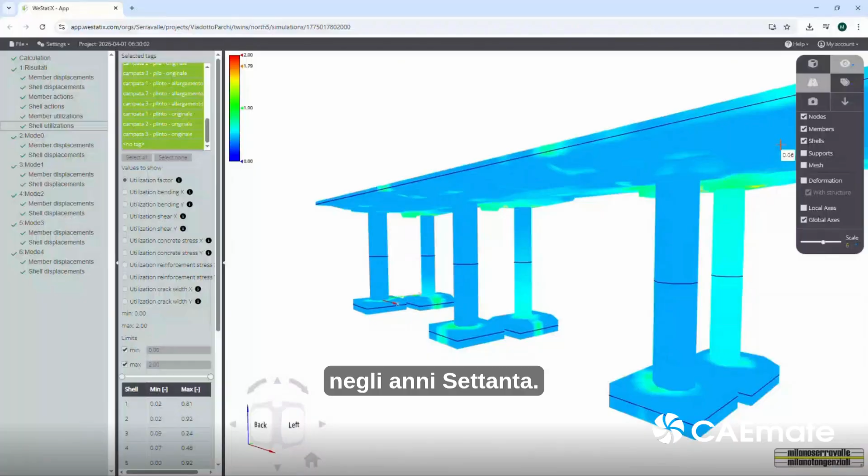Among these, one of the most significant structures is the Parchi Viaduct, located on the eastern ring road of Milan. The Viadotto dei Parchi is a critical structure within the Milano-Serravalle motorway network and plays a key role in the region's transportation infrastructure. Originally designed by the engineer Silvano Zorzi in the 1970s, the viaduct has a continuous deck structure with spans of 24 meters. The structure is made of post-tensioned and pre-stressed concrete. Its design features a zero-moment point positioned at 7 meters from the pier axis, realized through a Gerber-type saddle system that ensures efficient load distribution and structural continuity.

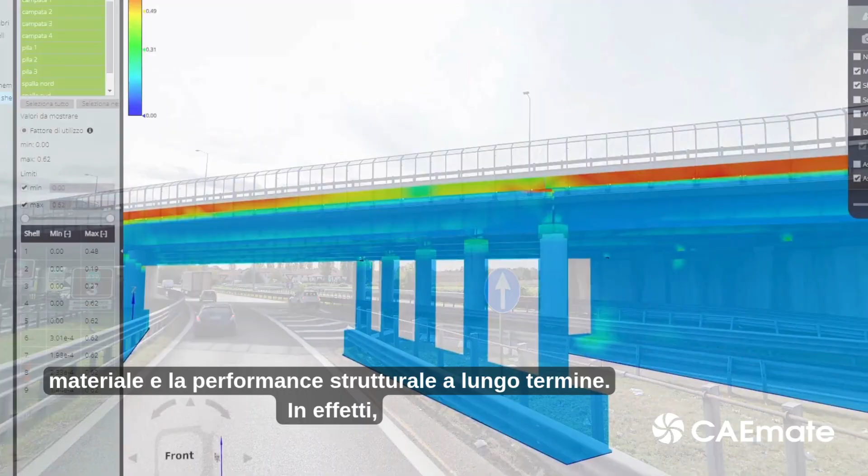The viaduct is composed of two parallel carriageways, each carrying a separate motorway lane, and extends nearly 3 kilometers in length, making it one of the longest and most strategically significant viaducts in the network. The structural complexity of the viaduct increased in the early 1990s when, in response to rising traffic volumes, an additional lane was added to each carriageway by widening the deck. This complexity makes the viaduct an ideal candidate for an advanced monitoring solution capable of tracking dynamic behavior, material degradation, and long-term structural performance. In fact, the structure was subject to periodic monitoring activities carried out mainly through inspection visits, which, however, cannot provide a quantitative assessment of the actual safety factor of the structure with respect to the load to which it is subjected. Finally, the inspection provides only discontinuous information on the structural behavior of the viaduct.

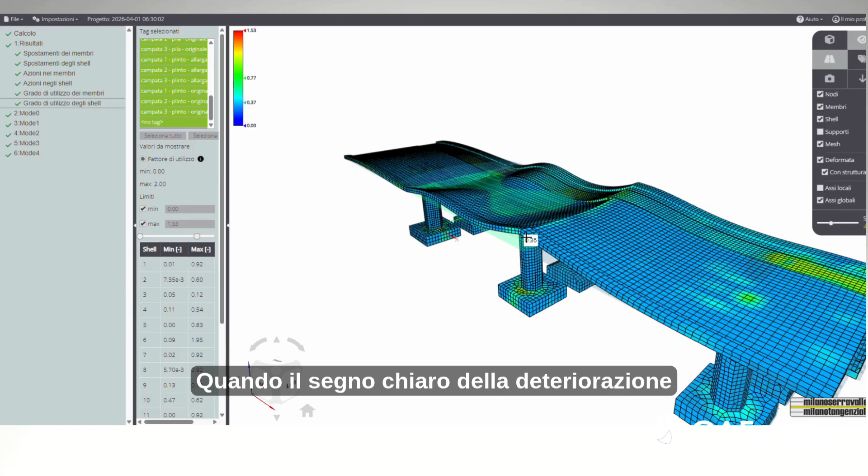Periodic inspections of all structures within the concession network are carried out by an external specialized company. Within our organizational structure, there is an office composed of 4 structural engineers who are responsible for summarizing the observations made and for verifying the data collected by the monitoring system. When clear signs of deterioration are observed on structures, it becomes necessary to carry out in-depth investigation campaigns and design checks, for which specialists are involved, generally from organizations external to the company.

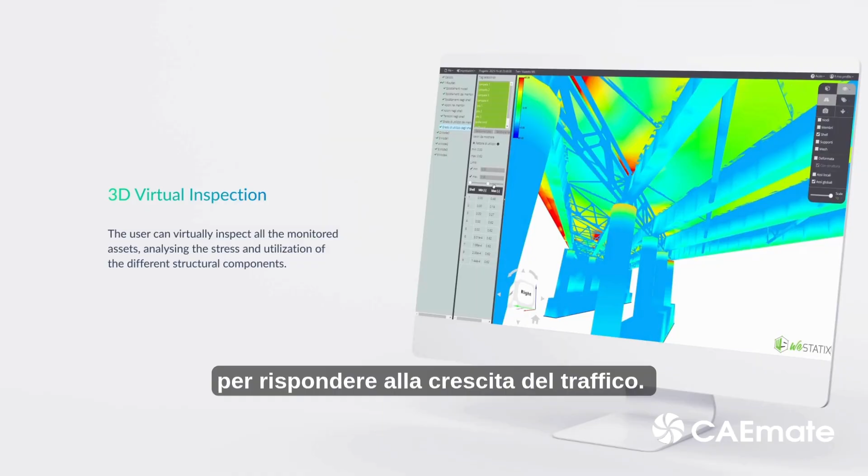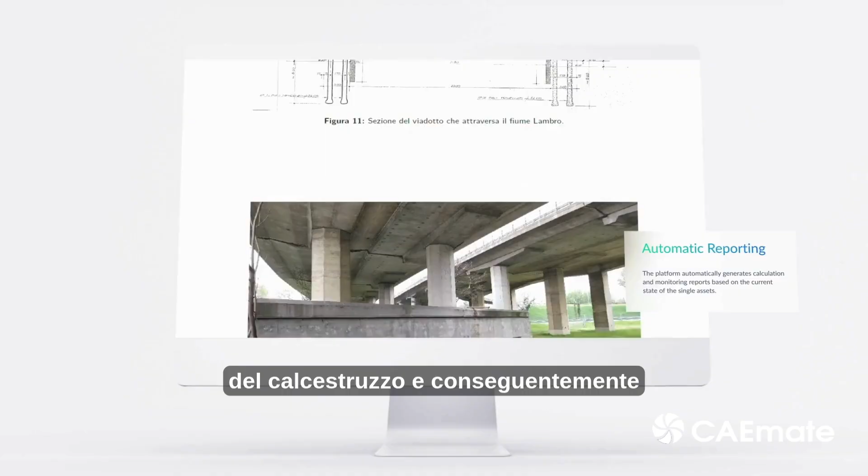The Milano-Serravalle-Milano Tangenziali SPA motorway network includes over 450 bridges and viaducts across 187 kilometers, most of which were erected during the 1960s and later expanded in the 1990s to accommodate increasing traffic demands. Almost all major historic structures were built in reinforced concrete, either conventional or pre-stressed, and are therefore subject to superficial carbonation of the concrete and consequently to the loss of the passivating effect on the reinforcement bars. In general, environmental exposure, material aging, and increasing traffic loads have pushed degradation mechanisms, increasing the risk of structural deficiencies. These aspects are exacerbated by the difficulty and in some cases the impossibility of inspecting certain parts of the structures, which nevertheless can represent elements of potential criticality, as is the case, for example, with the Gerber saddle embedded within the thickness of the deck of the Parchi Viaduct.

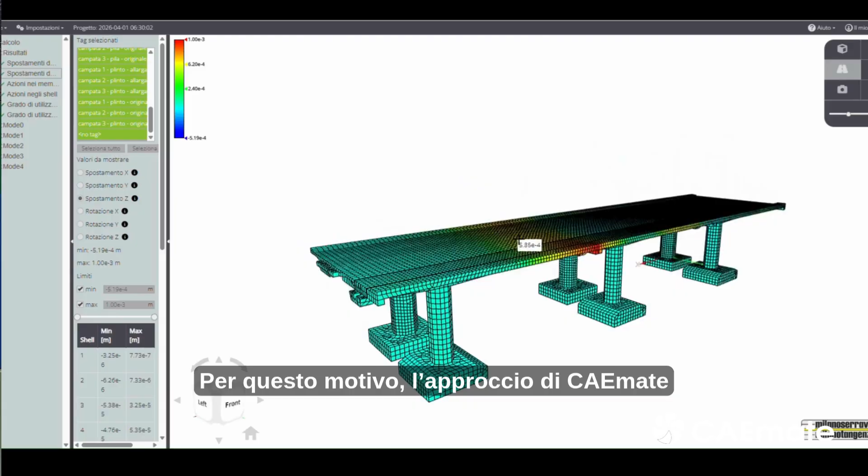I got in touch with CAEmate in 2023 when Serravalle received European funding for the implementation of an SHM system. We were confident that collecting a large amount of data from the sensors installed in the structure would lead to significant interpretation issues if the data were not processed and compared with theoretical predictions of the structure's behavior under load. The difficulty lay in the lack, at least for some of the structures, of complete design documentation dating back to the time of construction, as well as the possible presence of construction discrepancies or hidden imperfections within the structure components. This aspect made it difficult to theoretically assess the behavior of viaducts and bridges under the effect of applied loads. For this, CAEmate's approach, based on reverse engineering processes driven by AI algorithms that make it possible to create a true digital twin of reality, had positively impressed us.

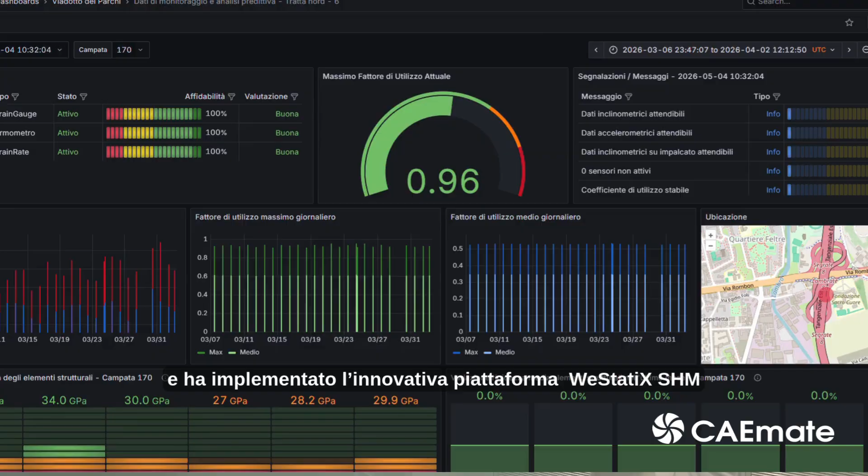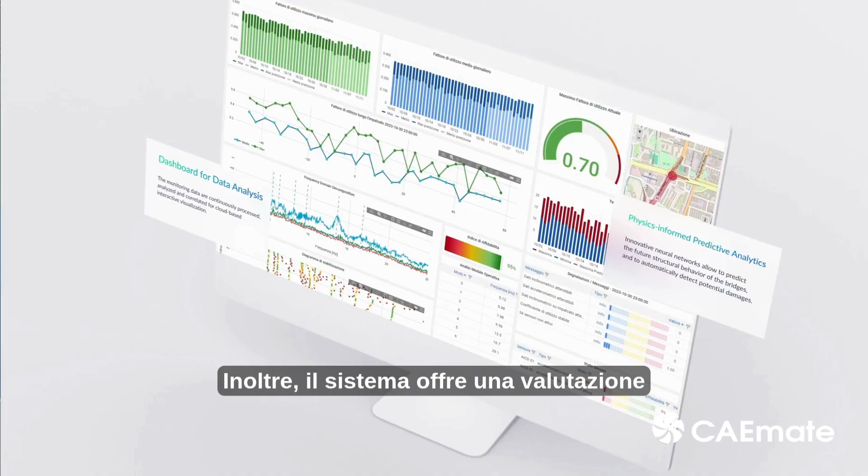To address these concerns, Milano Serravalle Milano Tangenziali SPA equipped its most critical structures with a comprehensive network of advanced monitoring sensors and deployed the innovative WeStatiX SHM platform to enhance real-time diagnostics, improve structural assessment accuracy, and support predictive maintenance strategies. The SHM system has been installed on all main viaducts along the motorway network managed by Serravalle, covering a total of approximately 340 spans. It enables continuous verification of the consistency between the static and dynamic behavior recorded by sensors and the theoretical prediction calculated on the digital twin. In addition, the system provides a continuous assessment of the level of material utilization within the structures, thus allowing for a coincident representation of the safety factor even in the absence of emerging anomalies.

Beyond improved awareness of the structural condition, the presence of a remote monitoring system allows, in accordance with Italian regulation, a reduction of the frequency of visual inspections, resulting in significant economic savings. The presence of the SHM system ensures greater awareness of the actual response of infrastructure to loads traveling over it. It also represents a powerful tool for documenting the condition of the structures at a given point in time and enables the recording and interpretation of any variation that may arise. Furthermore, the system ensures greater objectivity in the assessment of the onset of defects, which during visual inspections carried out by technicians often tend to be overestimated.

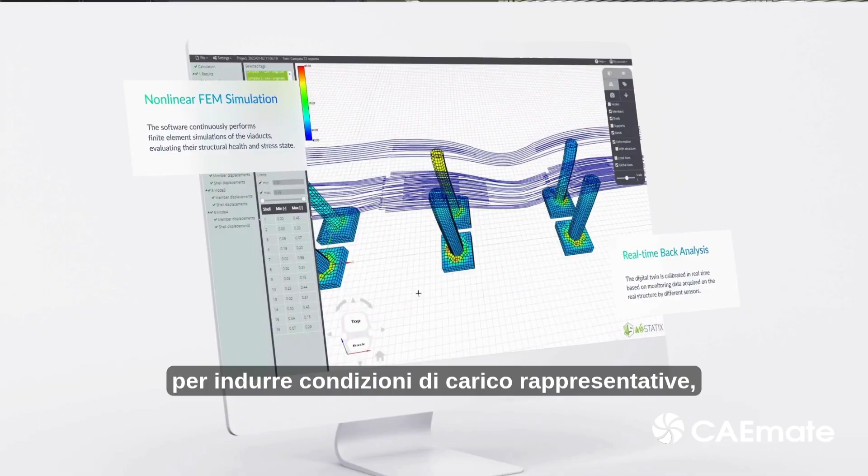In May 2021, several spans of the viaduct were subjected to static loading using 6 fully loaded trucks, each weighing approximately 30-32 tons. The load configuration was strategically designed to induce representative loading conditions that could accurately reveal the structural response. Displacement data was recorded using topographic survey methods to measure deck deflection under loading conditions. Later, the digital twin model was employed to simulate the same load conditions, integrating details such as vehicle position, tire contact pressure, and asphalt layer load distribution. The comparison between measured displacement and predicted values from the digital twin showed remarkable alignment, with the discrepancies remaining below 5%. This result confirmed the model's high fidelity and its capability to replicate the real-world structural behavior with precision.